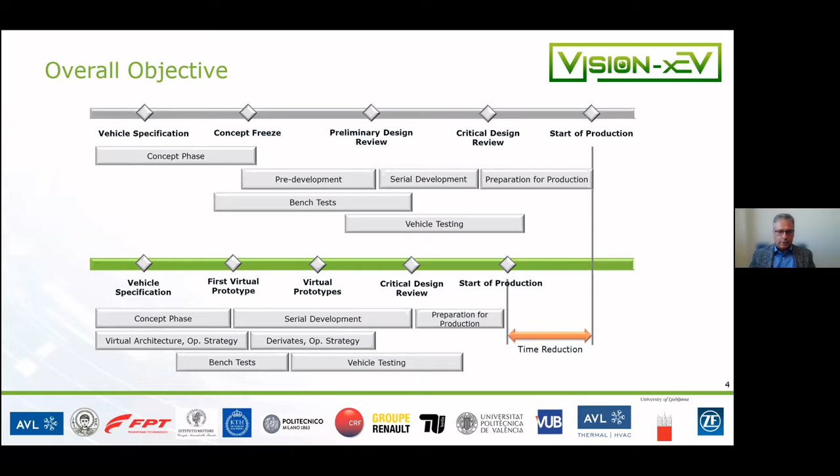Well, this overall objective within VISION-xEV leads to a number of specific technical objectives we identified in the proposal preparation phase, and we're addressing in the course of the VISION-xEV activities. So it's by reducing the experimental effort required to parameterize specific component behavior, and to derive and parameterize the corresponding simulation models.

So that's one focus of activities, and another strong focus is on developing methods and tools and workflows to enable seamless coupling of the individual component and subsystem models in order to enable their co-simulation, in order to be able to efficiently and in a fast manner build up digital twins of the entire powertrain and vehicle system, and to support stable, robust, efficient simulation of the system behavior under real-world driving conditions.

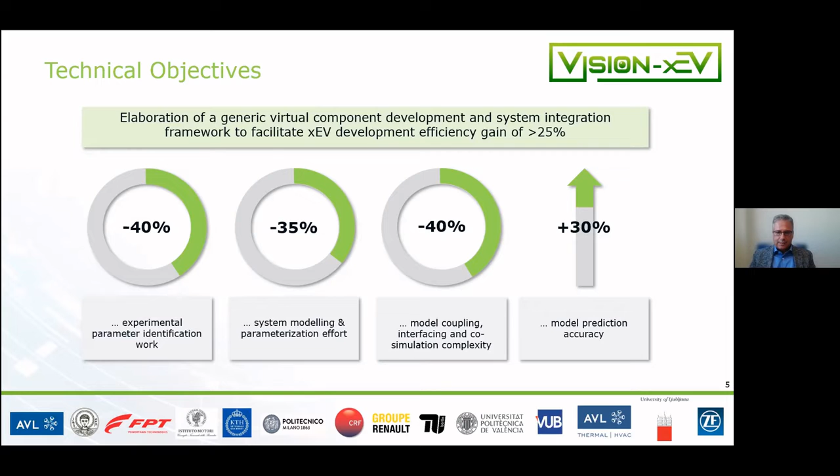The activities have been focusing on the different components and subsystems of electrified powertrains, and let me give you some overview of highlights that have been achieved in the course of the project. And there was one strong focus on the modeling and simulation of the electrical energy storage components and systems in order to facilitate an efficient experimental characterization of the behavior of the battery and supercapacitor cell on a laboratory scale.

And here VUB and CNR carried out a comprehensive set of activities in order to reduce the effort in experimental characterization of the electrical and thermal behavior of battery and supercapacitor cells, which then served as input to parameterize corresponding simulation models representing the cell characterization for further usage in the context of detailed 3D simulation of the multiphysical behavior of an electrochemical battery and supercapacitor cell in the context of battery module and battery pack.

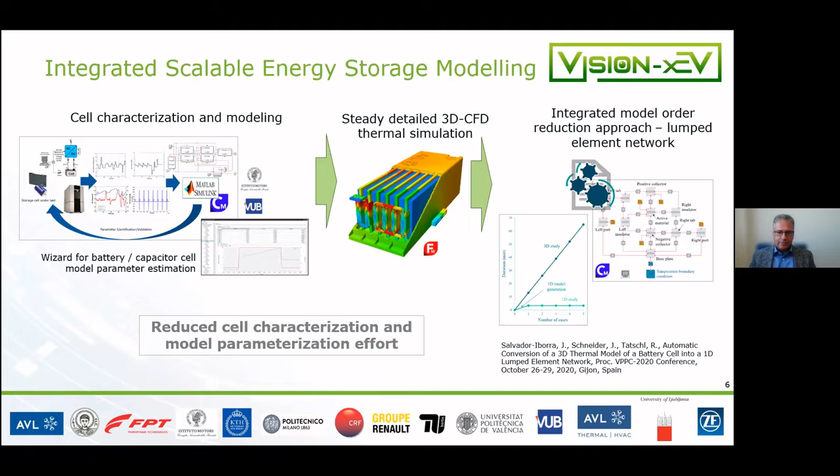As a second decisive component of electrical powertrains, VISION-xEV has been also focusing strongly on the conversion of electrical energy into mechanical energy, and we had a dedicated work package focusing here on modeling and simulation of electrical machines and the related power electronic component. Also in terms of a multiphysical view in order to involve all the relevant aspects, electrical, thermal, mechanical aspects into the simulation activities.

So detailed 3D simulation methodologies have been advanced and optimized in order to enable a detailed insight into the electrothermal characteristics of power electronic and e-machine components. And strong focus was put here also on methods to use detailed 3D information in addition to experimental data to build up and parameterize high fidelity system level models of the different kinds of electrical machines, with a strong focus on induction machine and externally excited synchronous machines.

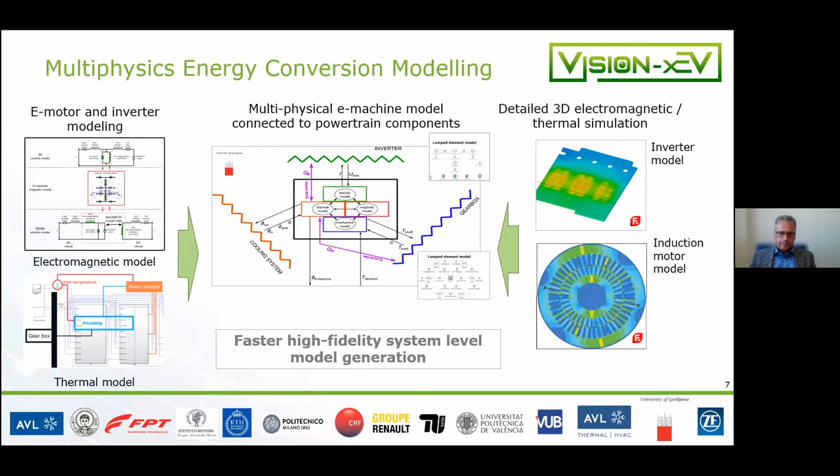Well, besides that, also some effort has been spent on updating and refining existing models on the internal combustion engine side and related turbocharging and after-treatment component modeling side in order to support different kinds of hybrid vehicles, with a specific focus on plug-in hybrid vehicles, especially with respect to the after-treatment side, where the plug-in hybrid vehicle operation modes lead to quite some challenges regarding keeping the temperature of the exhaust system at sufficiently high level during all driving operations. So ensuring that the conversion efficiency during real driving cycles is always kept on a very high level, which will bring also additional and new technologies with respect to phase change material or electrically heated catalysts.

And for these new technologies, models and related parameterization methods have been developed, as well as the coupling strategy to have the IC engine models and the after-treatment models seamlessly work together in a highly accurate and highly efficient manner. So here the Politecnico Milano was focusing on the IC engine models and the integration activities of models from TU Berlin and KTH on the turbocharger side, as well as models for the after-treatment system provided by University of Thessaloniki and thermal engine management system models contributed by University Valencia.

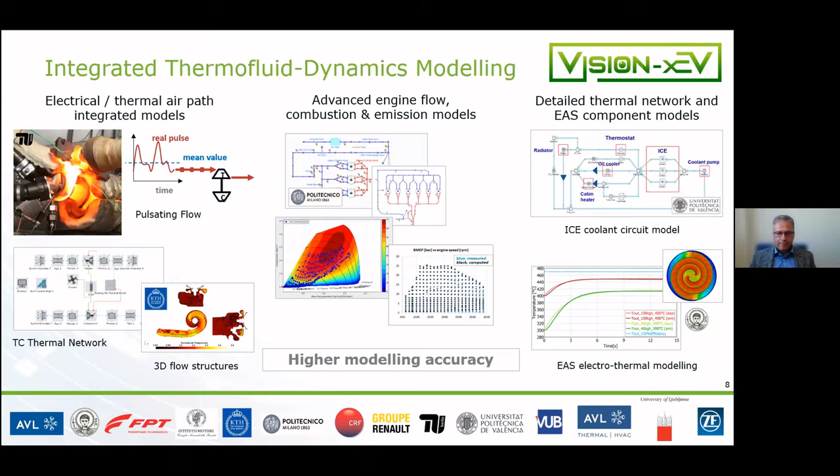And as a major activity in the second half of the project, these component and subsystem models were coupled and linked together, and for this purpose, interfaces have been defined in order to get a realistic and reliable physical representation of the interplay of all the individual components in electrified and hybridized powertrain systems, models that are originating from different partners, from industry partners, from academia, models that are based on different modeling platforms, different commercial software tools, in-house tools.

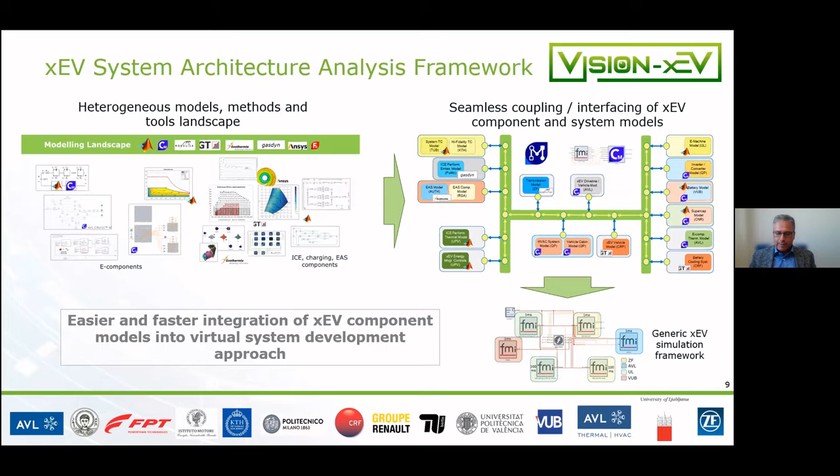And these interfaces were defined in mutual interaction with all the partners, and were used then in the implementation activities, in building up the overall simulation framework to ensure that all the individual models can seamlessly work together and can work in a robust, numerically efficient way, so to represent flexibly all different kinds of electrified and hybrid powertrain systems. And so here the AVL activities were strongly focusing on the system architecture aspect during the concept phase.

Politecnico Milano, University of Valencia, TU Berlin, and University of Thessaloniki were focusing on the coupling of the thermodynamic part of hybrid and electrified powertrain systems to support efficient engine after-treatment system coupling for applications under real drive cycle conditions with close to real-time performance in order to predict tailpipe emissions during WLTP cycles, during all different kinds of real drive cycle conditions, and to support the evaluation of engine start and stop impact on fuel consumption and emissions.

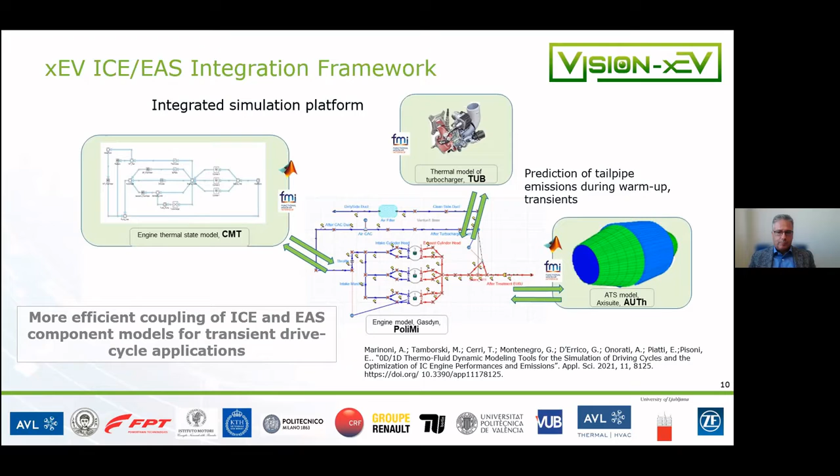In order to properly account for the thermal aspect of the entire powertrain and to also include aspects of vehicle cabin heating, ventilation, air conditioning system, and specifically to address different concepts of powertrain component subsystem cooling, thermal management, thermal conditioning of hybrid electric vehicles and specifically of battery electric vehicles, AVL Thermal and HVAC established and built up a framework for a holistic vehicle thermal management system with open interfaces to seamlessly integrate and couple battery models, supercapacitor models, engine models from the different partners into this thermal management view.

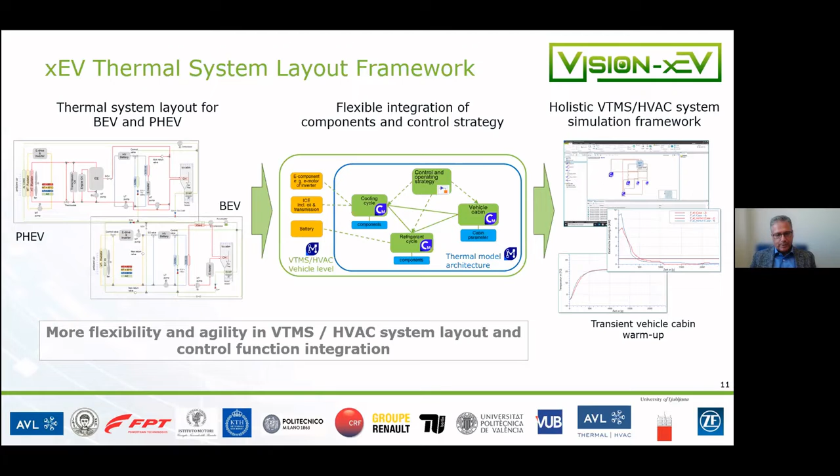To be able to deal with aspects of transient powertrain and vehicle cabin heat up, to enable a flexible, holistic thermal analysis of battery transient heat up during different ambient conditions, during different drive cycle conditions, and also to provide the basis for an integrated thermal management control function development.

So this control function development and control framework aspect on the entire powertrain context was dealt with by University of Valencia, with dedicated activities aimed at providing a platform for optimization of electric and hybrid vehicle energy management related tasks.

In this context, the framework was built up and validated based on experimental measurements carried out on the test bed, and the applicability was confirmed for different analysis and optimization tasks with respect to fuel consumption of different powertrain configurations for real-world driving cycles under different battery state of charge constraints.

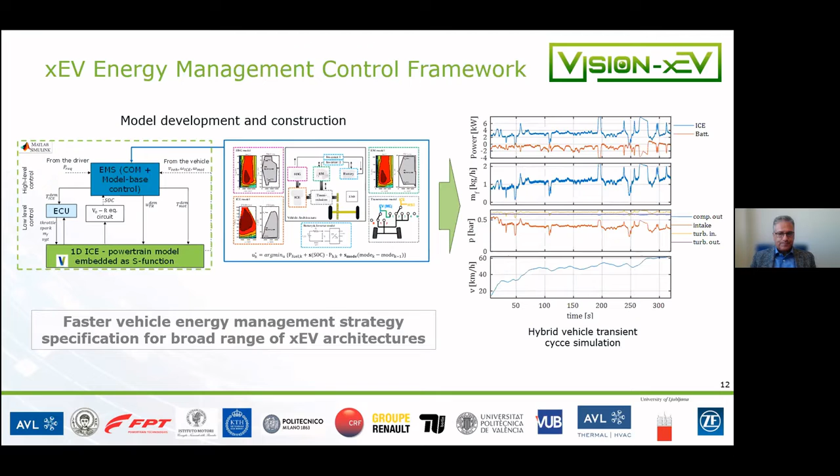And in order to have a sound basis for model and model coupling validation, real-world driving cycle studies were carried out by University of Thessaloniki and CNR with different hybrid electric vehicles, supplemented or supported also by virtual testing activities in order to reduce the number of real-world driving tests to be carried out.

So with this joint testing and simulative approach, it was possible to reduce the number of real-world tests to around 25 and to carry out a large number of additional cases and mission profiles based on pure simulation, which finally resulted in about 35% reduction in the testing effort.

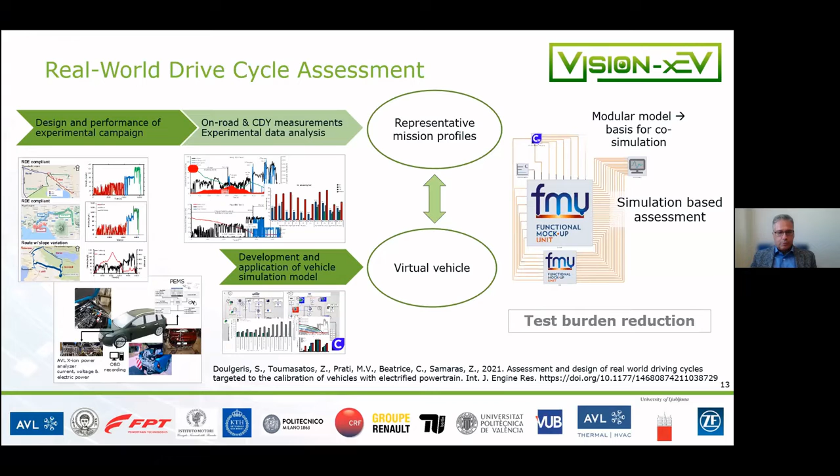And so based on these activities, it was possible to analyze different real drive cycles to evaluate the impact of different parameters on the whole plug-in hybrid electric vehicle performance and subsystem operation, and also to derive generic representative driving profiles to serve as a cross-reference among the different validation and demonstration activities within the project.

And these validation, impact assessment and demonstration activities were to prove the applicability of the modeling and simulation framework set up by the VISION-xEV project. These demonstration and impact activities were carried out on the basis of 4 selected industrial use cases or use case clusters, so to say, that were related to aspects like battery system thermal management.

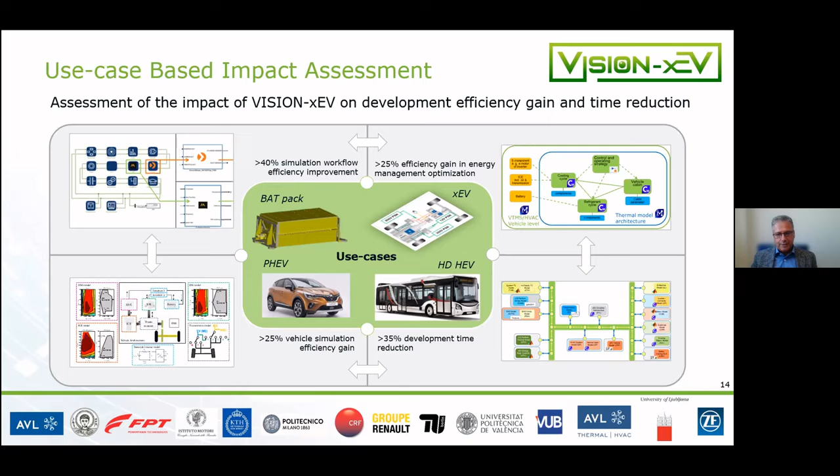There were use cases related to plug-in hybrid vehicle and engine after-treatment system matching for real driving cycles, activities related to vehicle architecture and concept design analysis for different kinds of vehicles, and use case 4 was related to the hybridization of a 12-meter urban bus, and to assess and provide results for assessment of the impact of the VISION-xEV achievements onto the development processes and onto the effort reduction and time reduction of different development steps and development activities.

So on the battery thermal management system side, the partner CRF, in close interaction with other partners such as VUB and AVL, built up a digital twin of a plug-in hybrid electric vehicle, including a digital twin of the entire battery thermal management system, in order to look into different aspects of thermal management system development and optimization.

In order to set up the seamless model exchange of the battery cell models with the partners, and in order to prove the interaction of the vehicle model and the battery thermal management system digital twin for the different driving cycles under different ambient conditions.

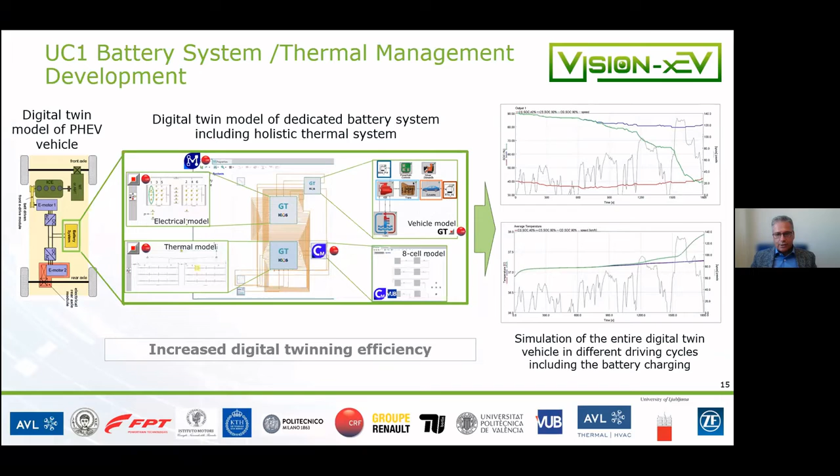So as a major outcome of these activities, a considerable increase in the efficiency in building up the digital twins and increased efficiency in exchange of models among the partners could already be demonstrated, and activities are still ongoing now towards the end of the project, and should definitely bring additional results on top of what already has been achieved.

Well, the AVL use case cluster is concentrated on xEV energy management optimization, and is composed of three distinct sub-use cases. One is focusing on a plug-in hybrid vehicle configuration with a strong focus on matching of the hybrid transmission with the vehicle and powertrain architecture, carried out in close interaction with the partners ZF and University of Ljubljana, providing the transmission model and the e-machine models respectively.

Together with the colleagues from thermal and HVAC, we have been focusing on battery electric vehicle thermal management aspects, building up a digital representation of a battery electric vehicle with two different kinds of thermal management systems, battery thermal and powertrain thermal management configurations, a traditional one and a novel innovative one utilizing heat pump technology.

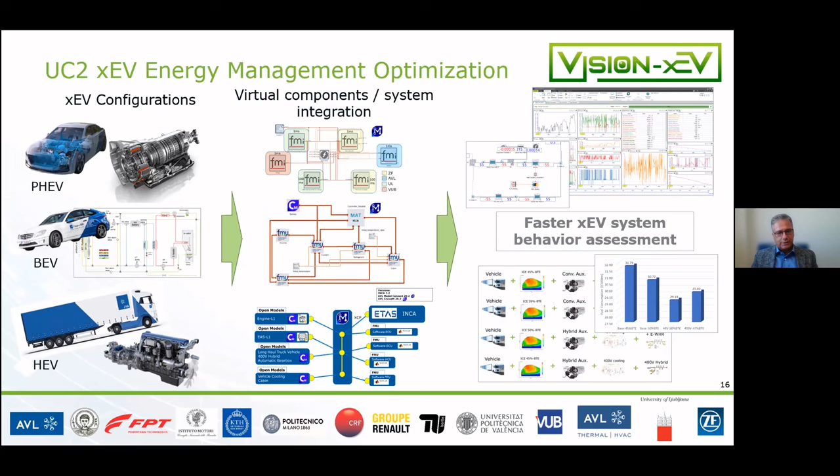Well, as a third use case, together with the university partners, University of Valencia, Politecnico Milano, and University of Thessaloniki, we are focusing on the matching of the plug-in hybrid electric vehicle powertrain with the post-Euro 6 after-treatment system, adopting technologies like electric heating, like phase change material on the after-treatment side, in order to achieve a hybrid vehicle operation under real drive cycle and ambient conditions by still utilizing highest pollutant conversion rates under all conditions.

And as you can imagine, the entire powertrain model comprises component subsystem models provided by all the different partners, models set up utilizing different modeling platforms, and is hence a benchmark use case for demonstrating the seamless exchange of models, the seamless integration of models of the different partners into the VISION-xEV simulation framework.

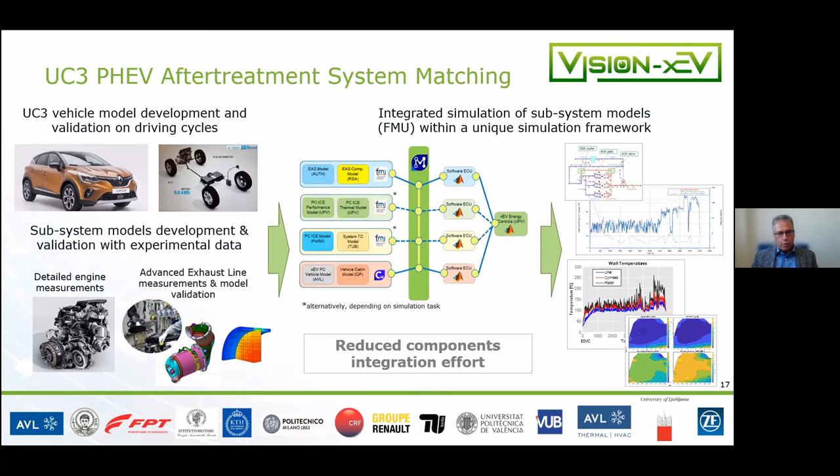And last but not least, use case number 4 from the partner FPT, which is focusing on bus hybridization, on system architecture analysis, and concept analysis of different hybridization configurations, is based on a defined set of test cases and on detailing different aspects related to the development process in order to work out and to demonstrate the impact of the simulation framework provided by VISION-xEV on the simulation workload, but also on the front loading potential of the simulation framework in the context of the overall vehicle development process.

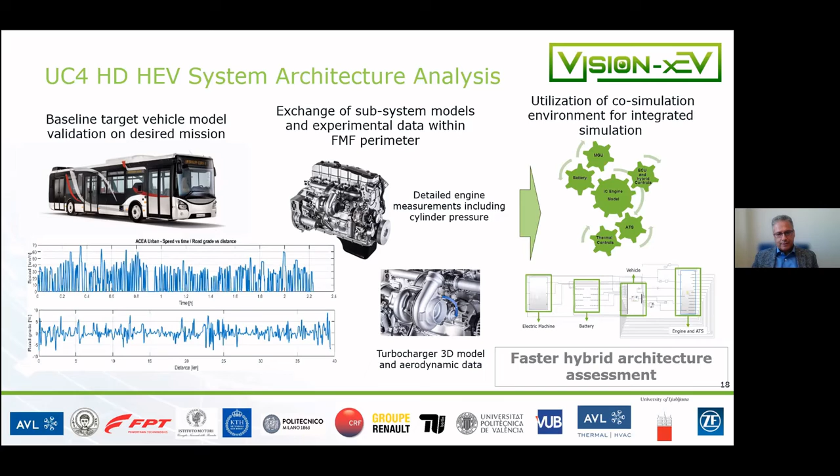And with this, let me briefly summarize the status 2 months before the end of the project. Considerable achievements have been obtained with respect to the electrical energy storage component modeling; superior and innovative component models, workflows, and parameterization methods have been elaborated. Also on the electrical mechanical energy conversion aspect, so on the e-machine and the related power electronic components, by utilizing high fidelity 3D multiphysics simulation for parameterizing fast system level models and hence reducing the required input of experimental data for setting up reliable models.

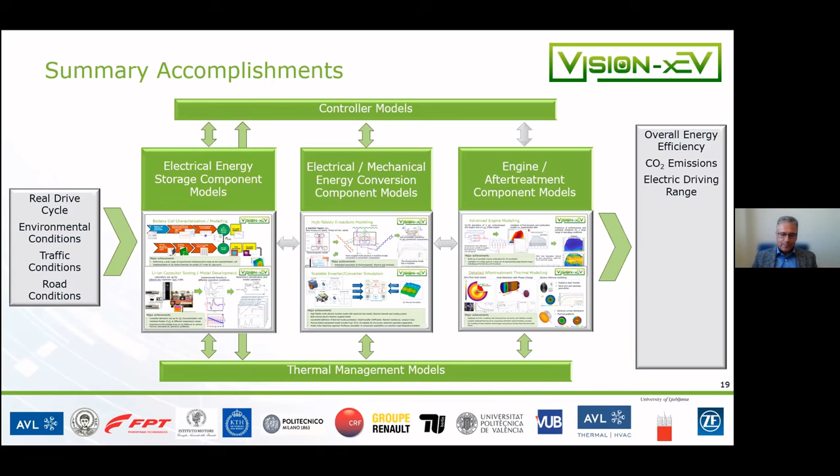On the engine and after-treatment component modeling side, considerable improvements with respect to the predictive accuracy have been achieved. In addition, models have been developed covering future after-treatment system technologies for post Euro 6 application. Models have been set up and validated for thermal management to cover thermal management aspects on the powertrain level, on electric component level, and on entire vehicle system level.

And controller model activities have now led to a status where automated control parameter optimization for the hybrid vehicle controller can be carried out in a very efficient manner very early in the development process.

Well, and this whole framework is now more or less readily available in order to use on one side the input of the real drive cycle, ambient conditions that might also include road conditions and traffic conditions via the inputted drive cycles, in order to then predict the electrified and hybrid vehicle overall energy efficiency, CO2 emissions, electric driving range, and much more, in order to assess the performance and to assess electrified vehicle component technologies to decide on the sizing and dimensioning of components, of subsystems in the office.